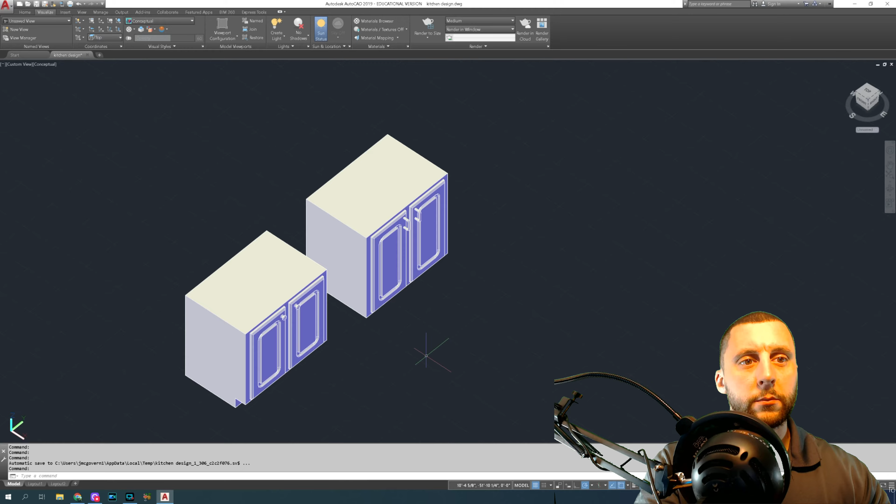Alright, ladies and gentlemen, welcome to part 4 of kitchen design. What we're looking at here is I wanted to cut out the hole or the area where the sink is going to go, and that's going to be this cabinet right here. Probably put a nice little window in front of that, and then I don't know, we'll go from there.

Okay, so going back out to our cabinets that we already have made, what I want to do is take a line and put one on this edge. We call these dummy lines, and we're going to put one on the back edge.

Now switching back to 2D wireframe, we now have two lines that we can offset across the top. So technically I actually want to put one down the middle both ways. Maybe that should have been my lines. Yeah, you know what, let's do that instead. Let's get rid of these two, and we're gonna make this into a sink.

Okay, so offset the sink. This is something that I usually go to HomeDepot.com and just find a sink that I like and see what the dimensions are, but in this situation I kind of have an idea of what size I want to go. This is a 36-inch cabinet, so if I left 4 inches around the entire outside, that's going to get me down to about 28 by, let's see, by 16.

Okay, so if it's 28 by 16, do half of those numbers. Half of 28 is 14, and half of, what did I say, 16 is 8.

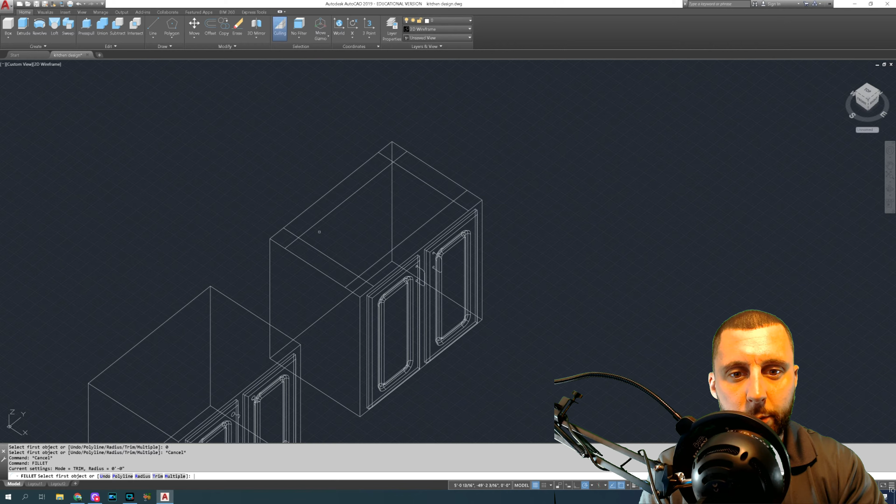Alright, now we don't need the middle lines anymore, and we're going to do a fillet radius 0. Actually, let's skip a step here. Fillet radius, let's do 2 inches.

So this is going to be a pretty big sink, but I also want to split it into two. So here's what I'm going to do. I'm going to leave 2 inches down the middle, which means you're going to offset one left and one right. Get rid of the middle line.

Trim between here and here. By the way, if you're ever having trouble trimming, you can do an old school trim where basically you type trim without hitting the extra enter, then click the two lines that are your boundaries and hit enter, and then click between the part that you don't want.

Okay, the other thing you can check is, I think it's called... oh, I'm already forgetting. Well, I'll get back to that if I can remember it. It's something Project 2 or something like that. Sometimes that setting is off. So anyways, we'll trim that, and then we'll do 4 more fillets at radius 2.

Alright, so now what we need to do is join these lines. If I go to the top, this is going to be a lot easier. Select both together, type join. They're going to stay separate. It's going to say 16 to 2 polylines, which is fine because we want 1, we want 2.

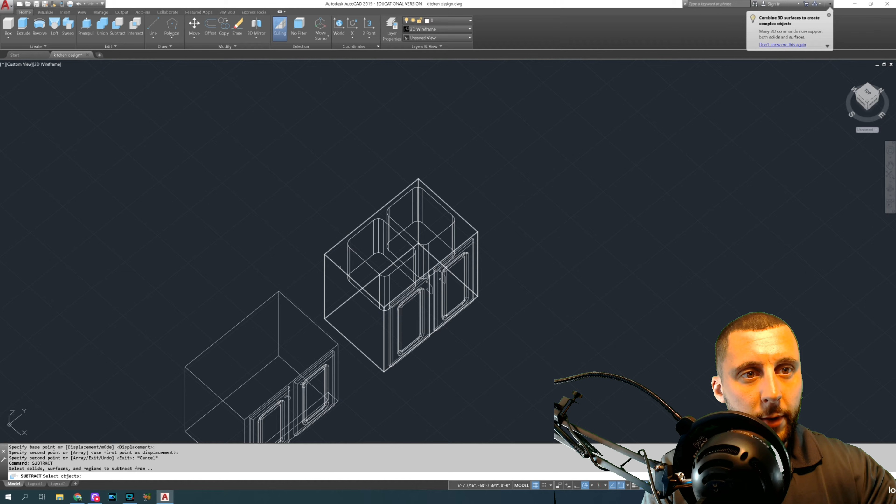That goes down into. I'm going to take these two, make copies of them, pick a base point, and then click it right down on the same base point. And then what I'm going to do is subtract from the main shape, enter, 1, 2, single clicks, enter. So now if I did take these doubles away, don't get confused here, you still have these doubles.

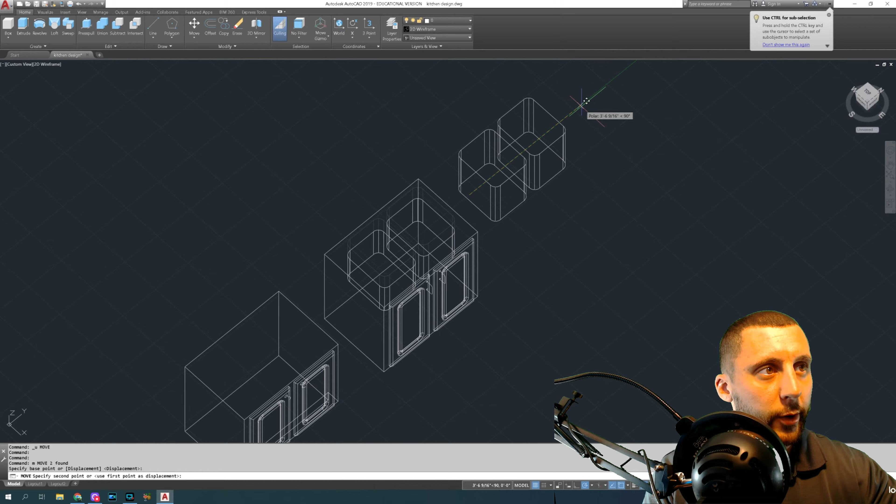If I take those away, you'll see that we cut the hole out for where the kitchen sink's going to go. Okay, so I actually am going to move these out for a second because I got one more thing I want to do. I'm going to move these out at a predetermined distance, like let's say 4 feet, and then I can move them back 4 feet when I'm done.

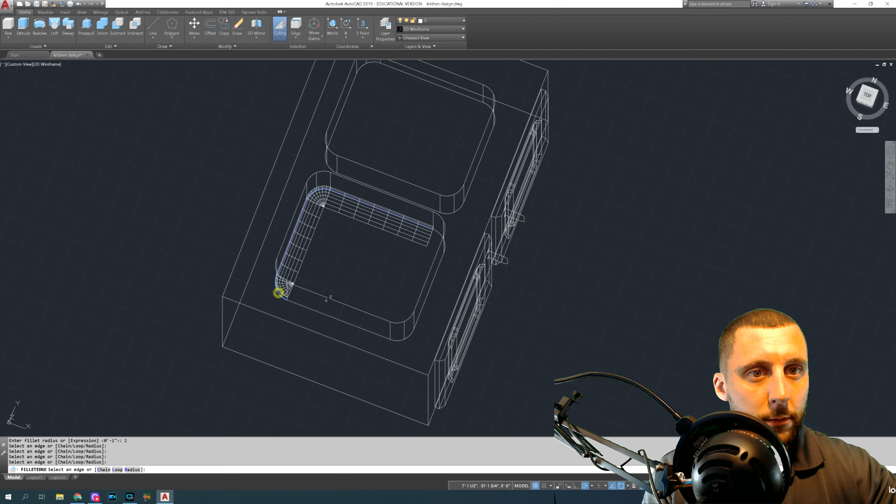I'm also going to go back to the top view, and I'm looking at a little bit of an orbit here because I want to do a fillet edge radius 2, and I want to go around the outside shape.

That way you get that curved bottom of your sink look, which we probably won't see in the render anyways, but if we do render it from higher up, it would be nice to see. Usually when I render something, I don't just render it from one view, I do a couple different views, so we might catch it in one of them.

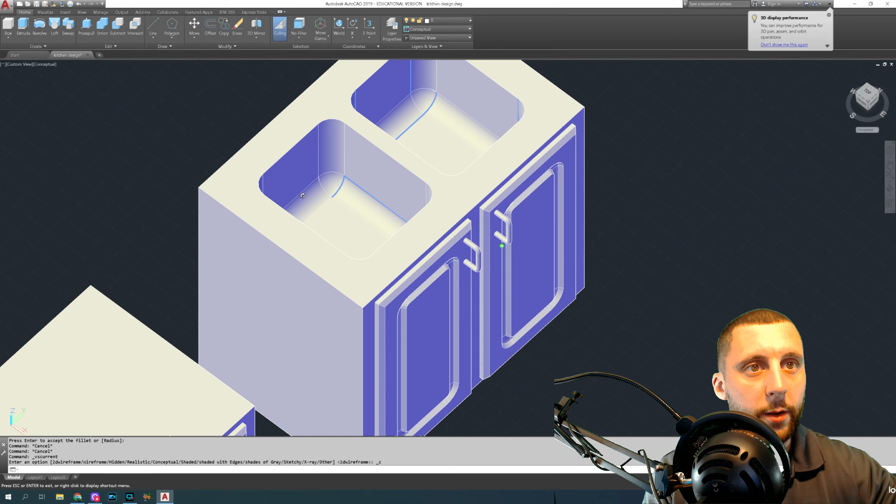Enter twice. Okay, so let's go to conceptual and see what that looks like. You get that nice bottom cabinet look, or bottom sink look. Alright, back to 2D wireframe.

Okay, so these are going to move back in. They're going to go 4 feet. Now they're back where they need to go. Back to the top view.

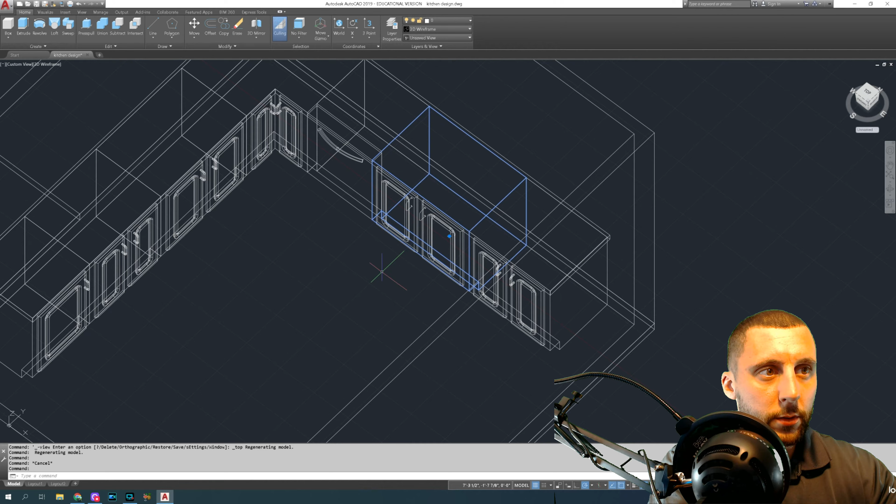Notice that this is the one that I'm replacing, so I'm going to take that box out. Let's see if we can grab it. Nope, that's the countertop. That.

Get rid of that. If I go to conceptual again, you'll see that there's nothing there. Well, if I took the countertop out, you'd see that there's nothing there, which we may need to move the countertop, so let's do that real quick.

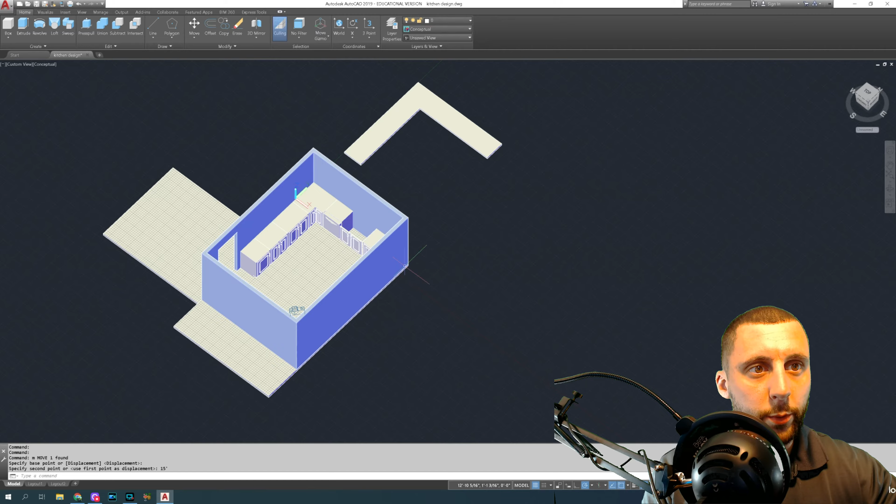Let's move that around 15 feet on the green line. Okay, 15 feet. We'll move it back 15 in a second.

We need to rotate this, so go to the top. Maybe we'll just make a copy of it. And where did that one go? Oh, there it is.

Okay, rotate. Alright, now back to 2D wireframe.

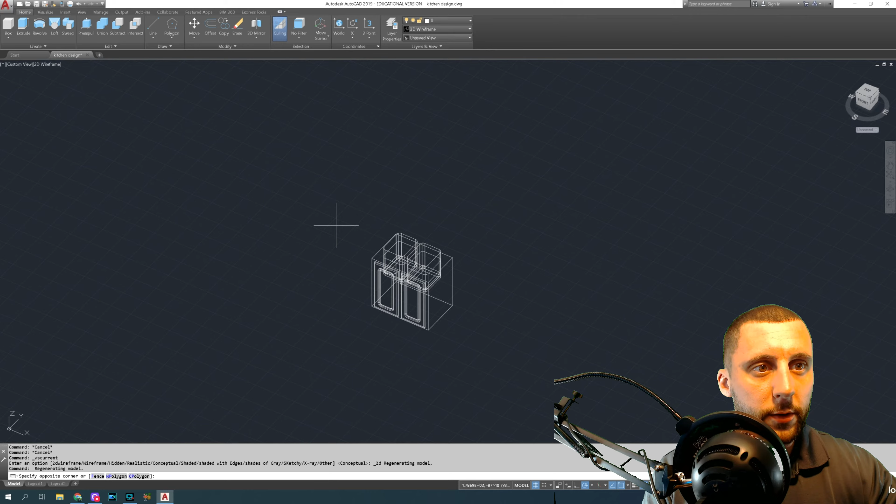I'm going to grab this whole thing and move it from this back right corner. And now this is where it gets confusing, but you can see that corner right there is where we want to go. And also, I got to get rid of these doors on here because my doors are still there.

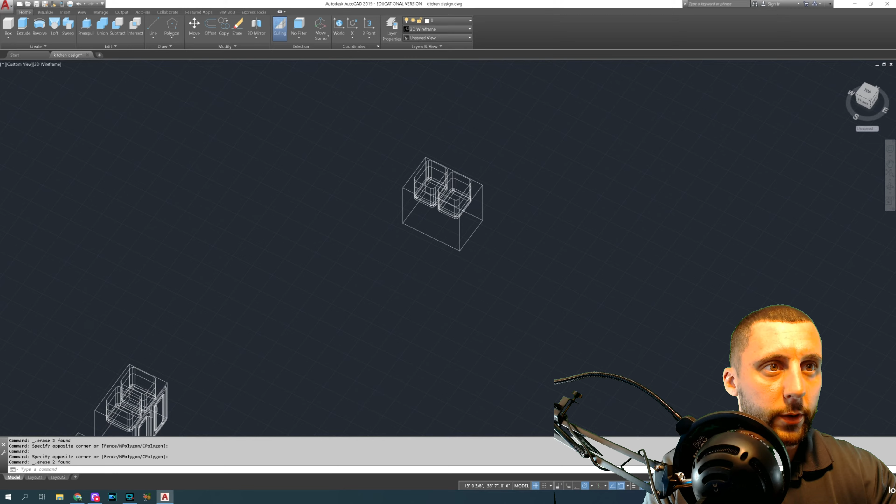So before I move it, let's get rid of 2 doors. Let's get rid of 2 knobs. We left our doors there. That's why we're doing that.

Alright, move back right corner. And we want right there.

Okay, now I'm going to move the countertop back in. We went 15 feet, stay on the green line. 15 feet, it's back where it was.

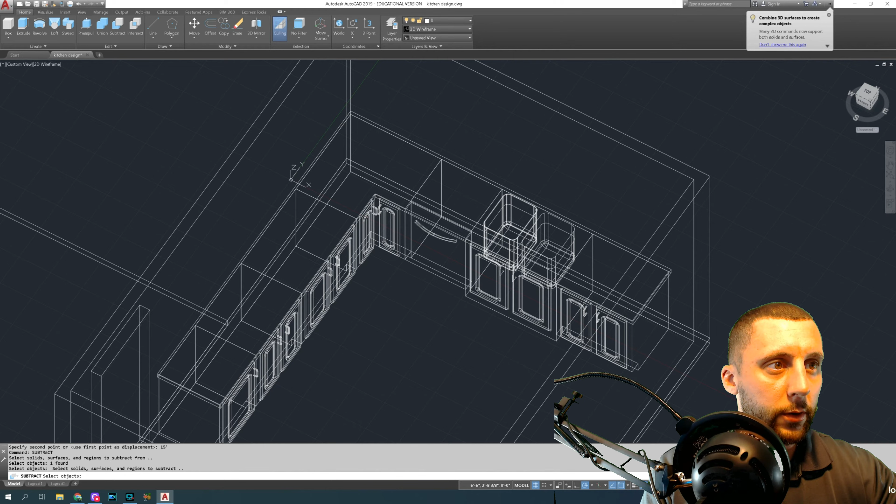You're going to do a subtract of the countertop, enter, and the 2 lines or 2 boxes that we made, enter. So let's see what that looks like. See how it's cut out for where the sink's going to go.

Okay, let's make some kind of faucet. So we're going to go back to our copy, or I guess our original. We can get rid of these 2. I'm going to create a faucet right here.

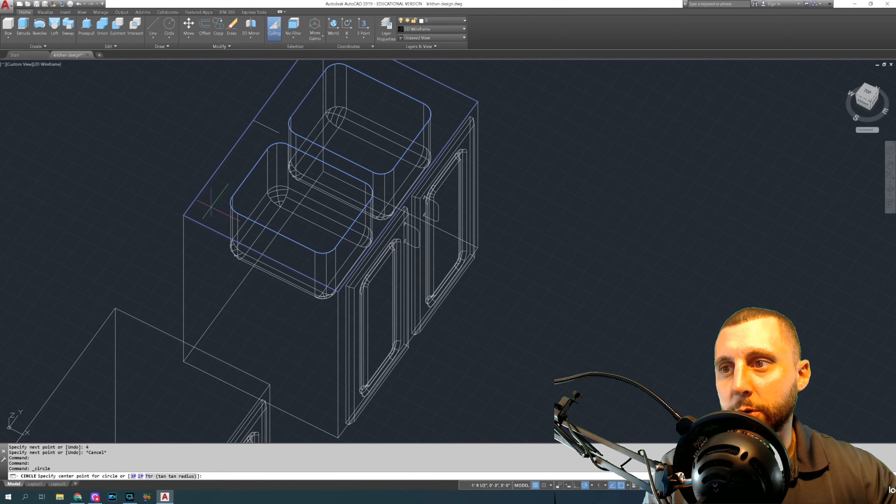Okay, so if I go from the midpoint, I'm going to go about 4 inches. That's just going to give me a point that I can draw a circle here. And make sure we're still recording. We are. Draw a circle here.

That's probably, I'm trying to think about what kind of faucet I want to do here. It's probably just going to be something simple, maybe a 2-inch diameter, so a 1-inch radius.

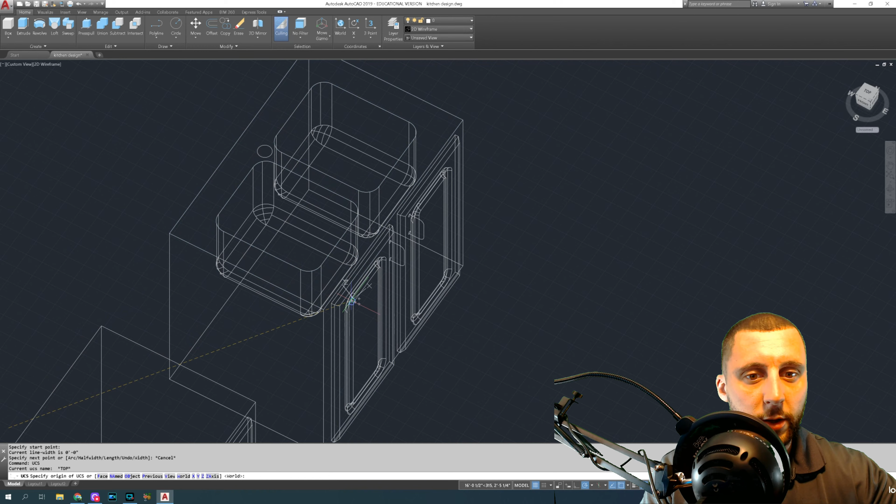Okay, and then what we have to do is we're going to have to draw, I think I want to do this with a polyline. We're going to go up. Let's see, I'm not getting a green line going up. So just make sure that UCS, yeah, UCS is on world, so that should be fine.

Let's go to our front view. Let's orbit a little bit. You know what? Sorry, go to the right view. Okay, we're over here. Orbit.

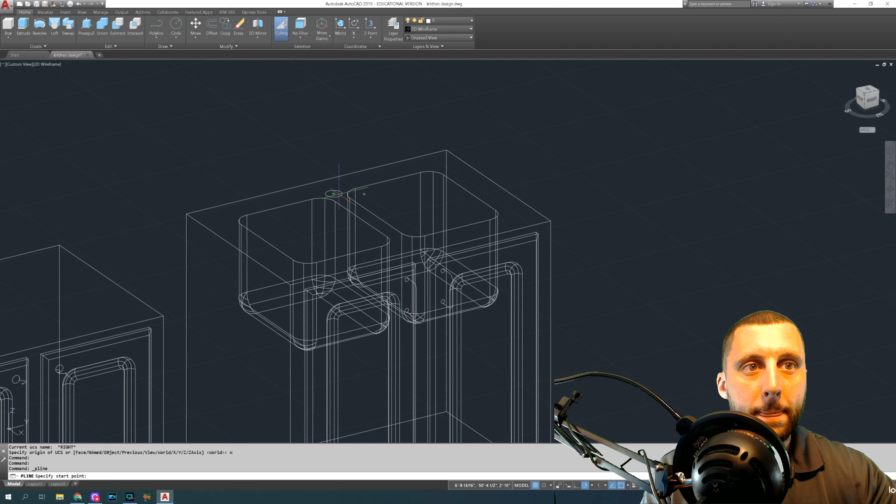Let's see if this allows us to draw up now. Center of the circle. Yeah, see, we can't get that line going up. So that's odd. UCS world.

Maybe it's the polyline, let's try a line. There we go. We're going to have to join it anyways because we're going to need a polyline.

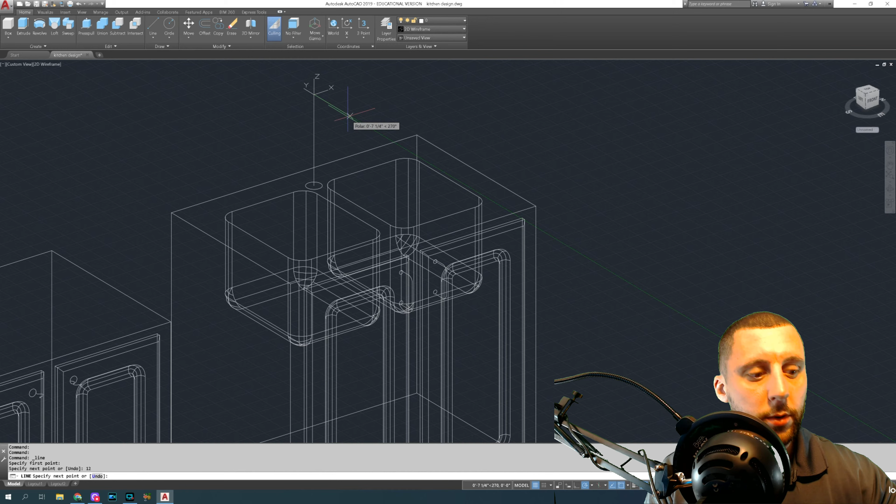But let's go up about 12 inches, and then let's come forward about... this is going to be one of those ones that swivels from one sink to the other. Obviously, it's not going to swivel. Let's come out about... I don't know, let's say 8 inches.

And then we're going to go to the front view and orbit down a little bit.

By the way, this orbit that I constantly do, I'm holding shift, and then I'm holding down the scroller on the mouse, and then I'm moving my mouse around. It's not the same thing as going to this orbit tool, because when I'm in this orbit tool here, I'm stuck in that tool and I have to hit escape.

Whereas if I'm in fillet radius, let's make this like a radius 2, I guess, if I hit this, I'm going to get stuck in the orbit tool and it's going to boot me out of the other tool. But if I go into, and I just do my orbit the way I just said before, it doesn't boot you out of that tool.

Alright, so we got that. Alright, now we're going to need a line going down. We'll go down about an inch.

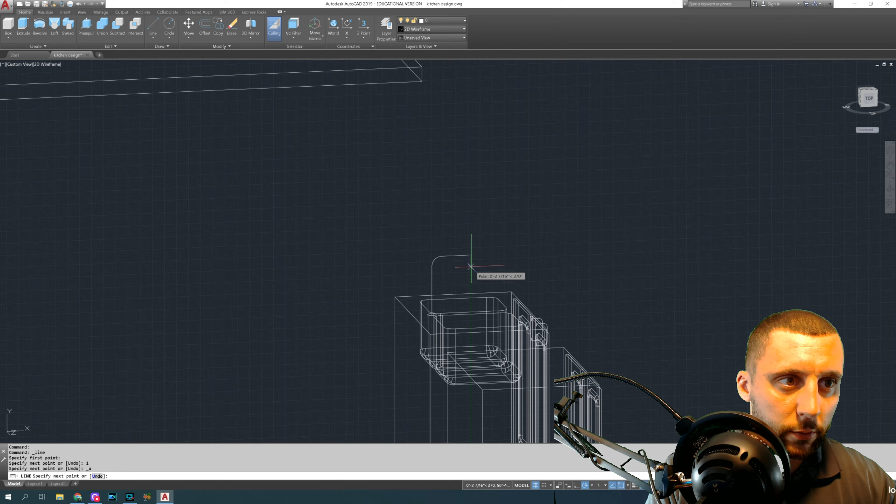Actually, we got to go down about 3 inches, let's go 2.5, because when I try to do this fillet, I need to be at least 2 or more. So we get something like that.

Okay, now take these lines, join them together, and then we're going to do a sweep. See how it went to a spline? That's okay, it should still work.

Sweep, what do you want to sweep would be the circle. Enter, and then what do you want to sweep it along? Let me get something like that. Let's orbit back and see what that looks like.

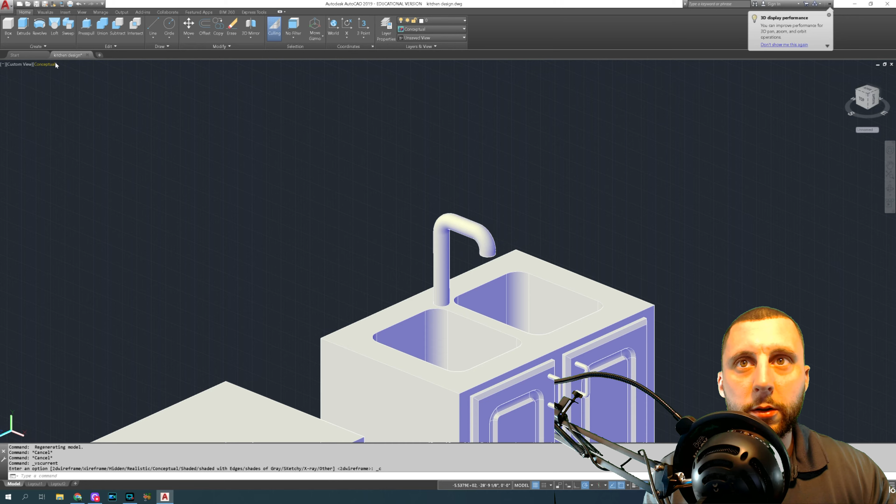Okay, that's a little on the thick side, so I'm going to back that down. Let's undo. Whoops, not that far. Let's stay... yeah, I'm sorry, it is going to be that far.

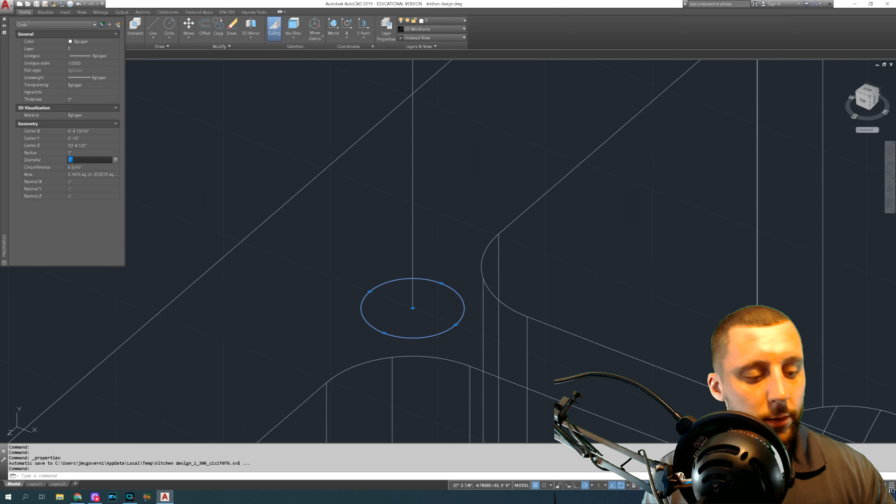We need to change this circle size. Here's another way to do it: click the circle, right click, go to properties, and you can change the diameter, let's say 1.25. Now it'll just do it from the center and size it down.

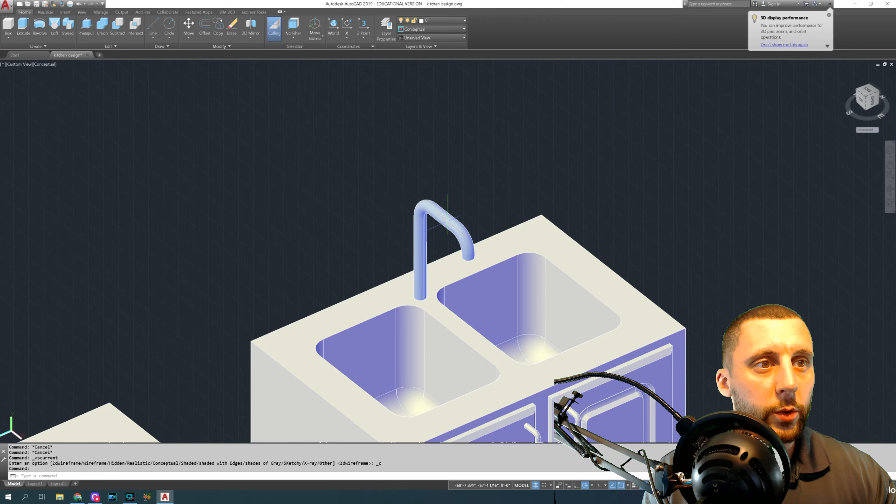So: sweep, circle, enter, spline, or whatever we have, polyline spline. So we get this shape. Let's go to conceptual view. That looks a little bit better.

Now what I'm going to do with this is take that shape again, go to the top, back to 2D wireframe, take this, and make another copy. I just don't want to disrupt the one that I already have. I should have made a copy before I cut that sink out, but that's okay, it doesn't really matter. I need to rotate this.

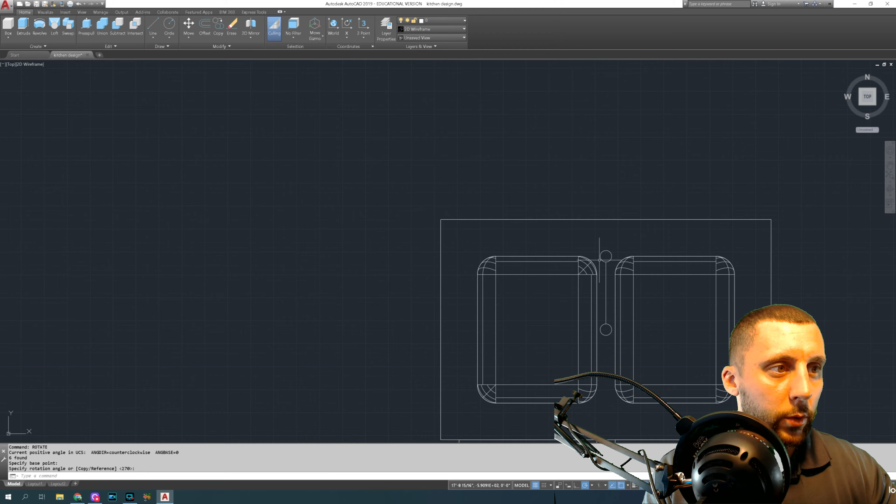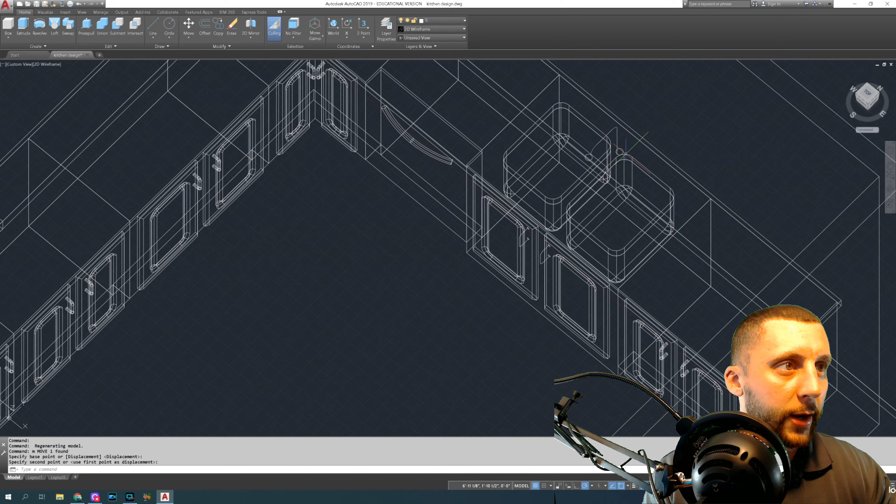Rotate, we're going to make it look like that. We're going to take this and move it from that same bottom right corner, although we're not going to be able to see that corner. Let's go into one of these handles, the right handle, the center of the circle - a nice base point that gets it in the same place that we want anyway. Let's see what that looks like on conceptual, and that's pretty nice.

Okay, it's just simple, you know, it's the Hollywood effect. Alright, let's cut out a window above that and then we'll call it a day on this part 4 video.

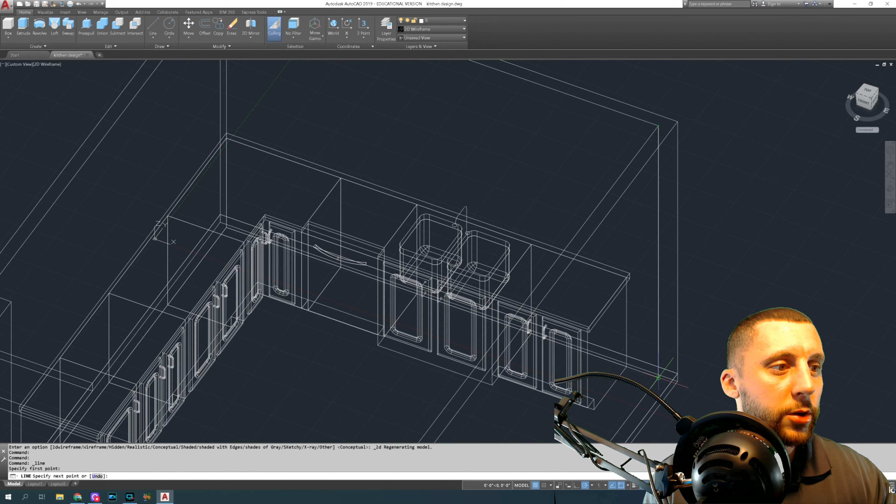So, 2D wireframe. What I'm going to do is draw a line on this inside edge, and draw a line on the top edge, and go to the front view and then orbit a little bit.

By the way, if you want to see what this looks like: view, double click on camera 1. You got to drop this down if you see the plus. Double click camera 1, hit apply, hit OK. So I don't have any materials on there yet, but you can see that the sink is cut out and it looks pretty nice.

Alright, so we're in the right view. This is going to come down. Okay, so I don't remember how far we made this - 7 feet probably, or maybe 6'8".

So let's go to the front real quick. Oh, I made the walls 8 feet. So if we want to go 7 feet, we're going to come down a foot. If we want to go 6'8", we're going to come down 1'4". 6'8" is really your standard height of windows and doors, so hopefully I did 6'8" when I did that door, but it really doesn't matter - sometimes doors have a higher head height than windows.

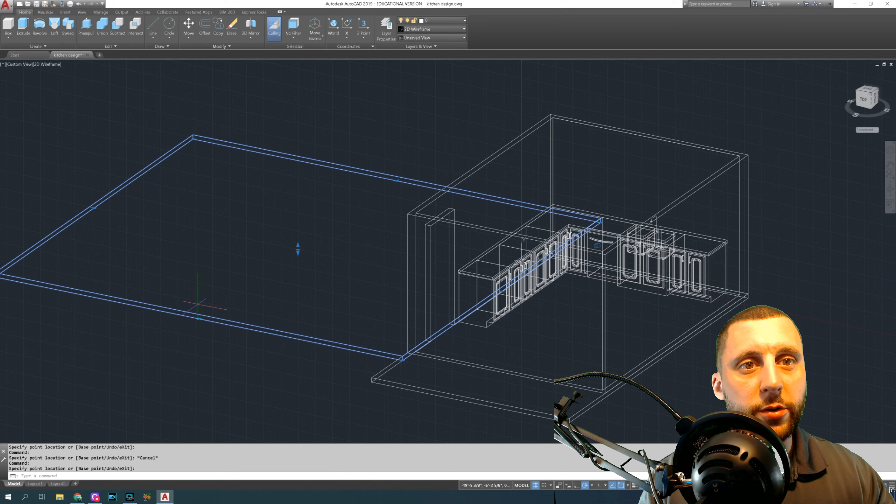By the way, this piece back here needs to be stretched more, because I was looking at the render and I can see a black space. With that black space, you either got to put a wall up there or put in this infinite floor. I'll show you what that looks like one more time.

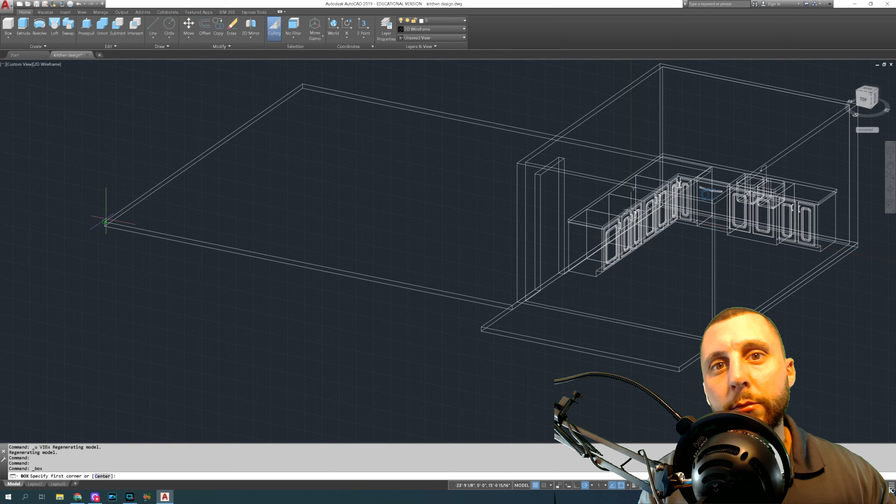View, double click, apply - see, we're seeing that black back there. So keep stretching that back if you want to keep seeing floor, or put a wall back there - that's totally up to you. Okay, that looks like a pretty big room there. So let's go back, maybe we'll just put a quick wall.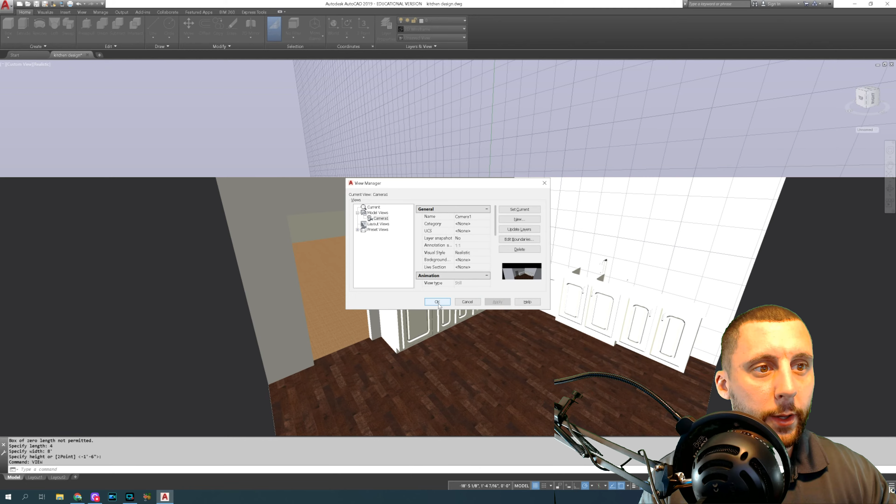Okay, we're going to click that corner, hit length, go back here, go this way on the green line 4, then go up 8 feet, and then go that way until we get to there. Let's do view again, double click camera, hit apply, hit OK - now we see a wall back there that we'll fill in with some kind of color.

Okay, alright, so going back, where were we? We want to come down with this line. So we're going to do an offset of 1'4" - that's going to be the top of our window.

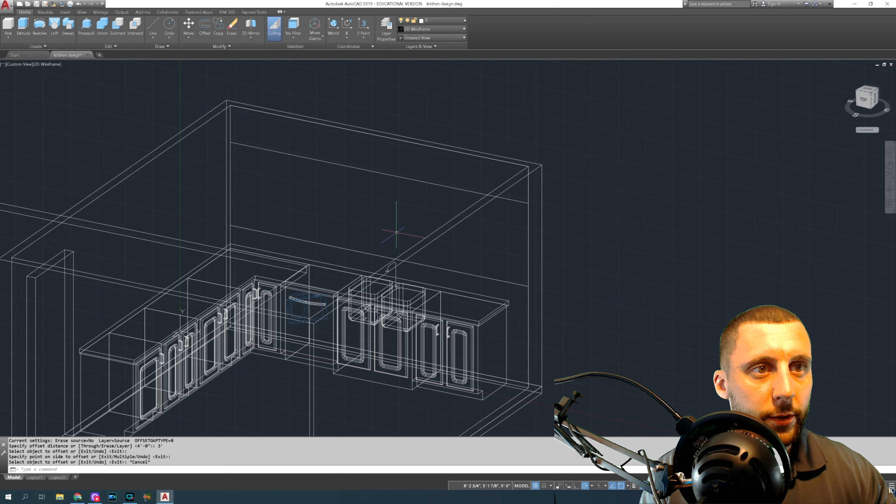If this is a, let's think, 3-foot cabinet, it's going to be a 2-foot wide window. So maybe the window itself is 4 feet tall. Let's come down 4 feet and see where that ends up. That's a little low - let's try 3 foot. That's pretty good, so that's a 3-foot tall window.

Okay, then we're going to come over - we want to get in the center of that cabinet there. I actually don't know how far it is from there to there. We could dimension it, well, let's do this instead. I don't think I put that in the middle of the room. Let's go like this and go back to the front and see how close we are.

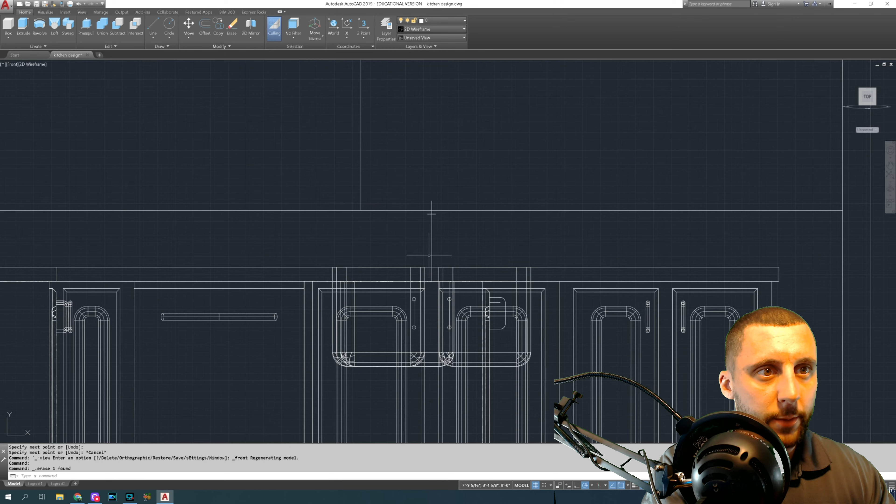Pay no attention to this one. This is on the other shape that's in front of this object. You'll see as I orbit down, that's way in front. That's not exactly centered, so I'm just going to look and see if I could get this.

Let's just go about 10. All right, that's pretty close to the center. It really doesn't matter. You're not going to be able to see how centered the window is, but we could have dimensioned it. I just don't feel like doing it.

All right, so now we're gonna make this a 2-foot window. We're gonna go 12 left, 12 right. Get rid of the middle line. Fillet radius 0, from there to there, all the way around. Now there will be no cabinets above the window, but we will have some top cabinets later that end at the window and then start and go over here. But we'll cross that bridge when we get there.

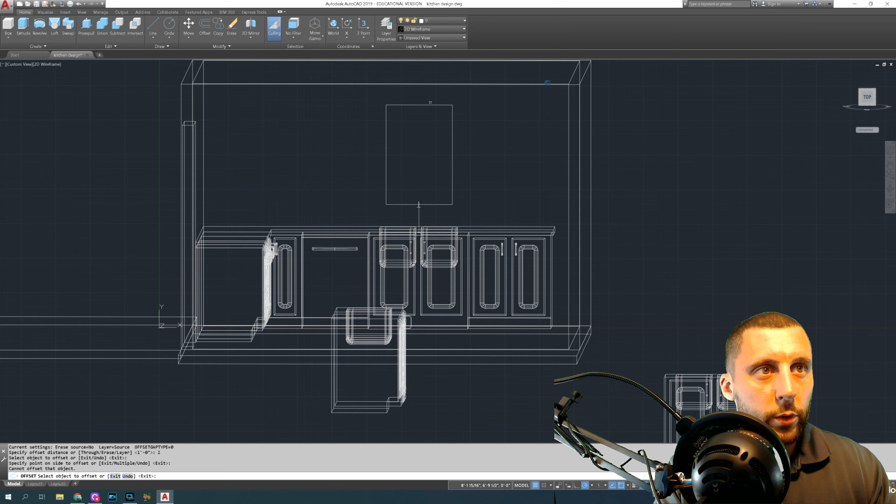Take these, join these together, offset by 2 inches, and bring that in. Whoops, why are we not offsetting? Let's reset our view, go back to front. Okay, get away camera. Offset 2.

Can we go 2 out? That's odd. Alright, let's copy this window out. You know what? Let's explode this, pull it back apart, offset 2. This is the long way of doing it, but for whatever reason, it's not working.

You probably won't have that problem. I don't know why I'm having some problems here, but if you do, then just explode it and do a radius of 0 for your fillet, and just go around and do this.

And now we got to select. You can actually select all these in one shot again, just like we did earlier. So we've got 8 lines. Join, it should go to 2 polylines or 2 3D polylines.

That's fine. This one is going to get extruded through the wall, -4, and you're going to subtract from the wall, enter, the window, enter. Okay, so now we have a hole there. So if I go to conceptual, you'll see that there's a hole. Okay.

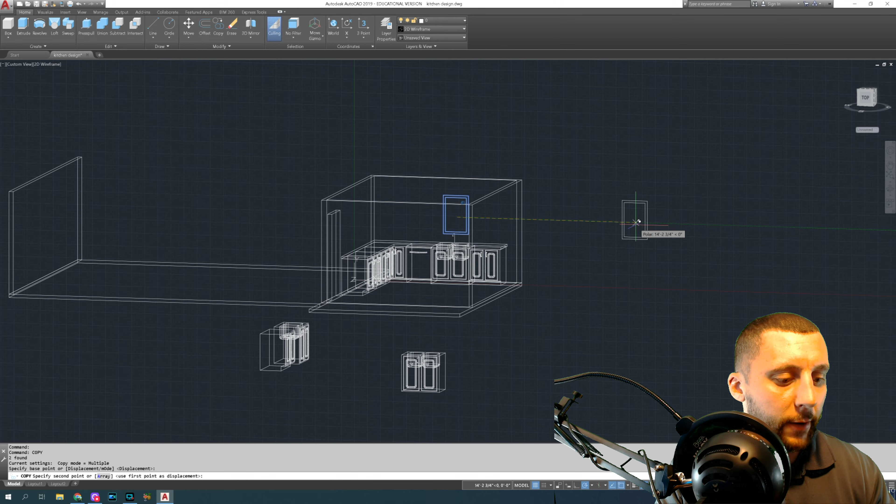You know what? Before you do that extrude, let's back up. We need a copy of this one. Let's copy this out. Copy, let's go out this way about 15 feet, and I'll explain why in a second.

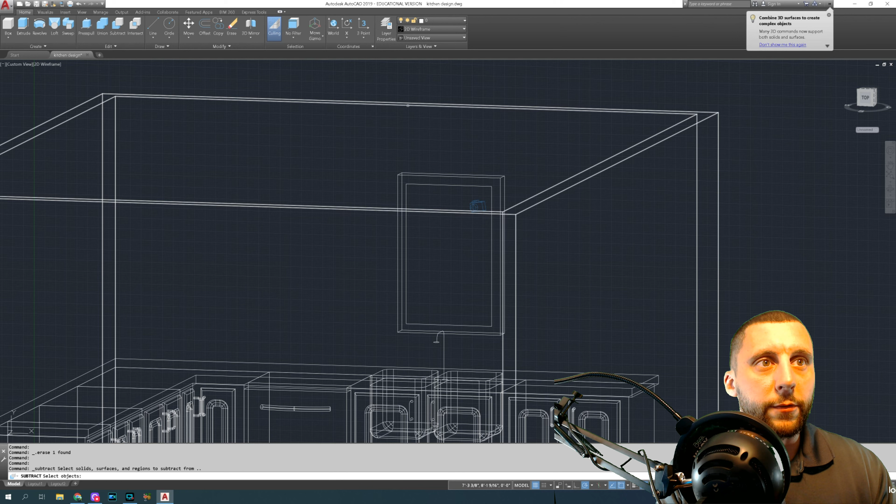Now you can extrude. Whoa, that was bad typing. Extrude -4, subtract from the wall. Oh, that's my dummy line, get rid of that line. Where's that other line at? I think we're good. Subtract from the wall, enter, the window, enter. So there's a hole there now.

Now go out here, let's go to the front, flat view. What I want to do is I want to extrude both of these -2, which is going to look like that. And I want to, before I go any further, draw a line across the midpoint.

I want to do an offset 1 down, 1 up. Get rid of the middle line. I want to connect here and there. 1, 2, 3, 4. Join.

I'm going to take that and extrude it back, -2. I'm going to union. I'll show you what this is going to look like in a second. Whoops, oh, let's do our subtract next. Subtract from the big window, enter, small box, enter. So you'll see that we get something like that.

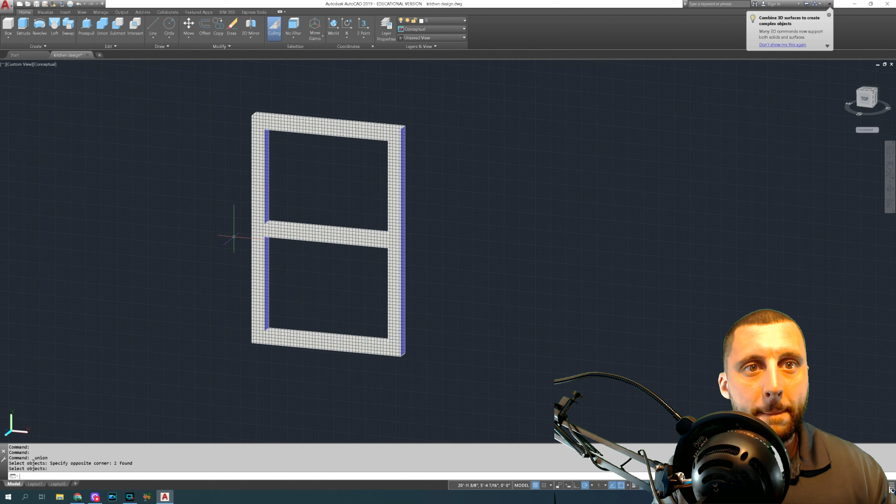But I want to union these together. Something like that. Now go back to 2D wireframe.

Okay, the last thing I'm going to do is put a box at the back of this that comes forward 1 inch. That's going to be filled in with some kind of glass. Usually I do a tinted glass, so otherwise you would see through it and just see into like black space out there.

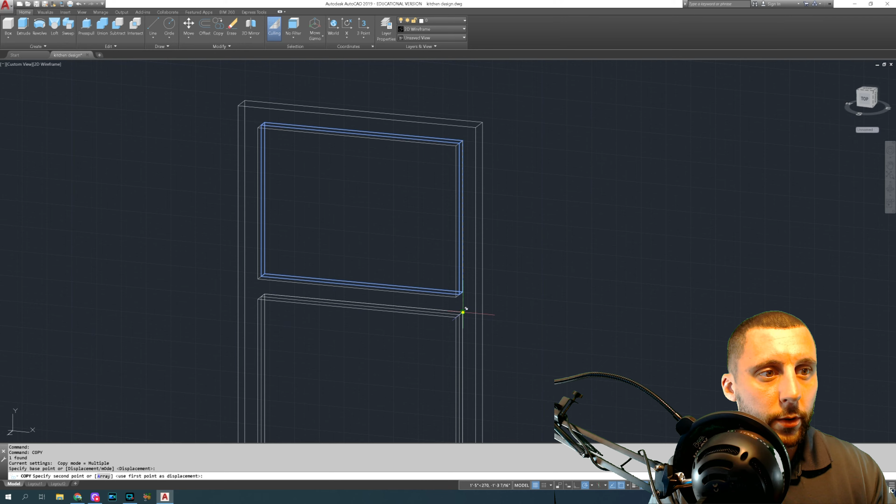But that'll go tinted. So we'll take that one and we'll copy it from the very back corner to the very back corner of this one. So this window's done. Okay, take this window.

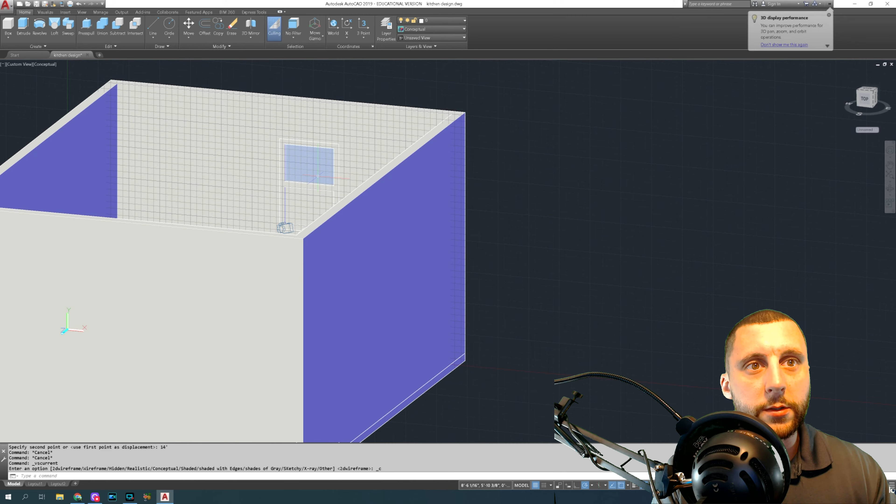We can actually get rid of this one over here. Take this window, move that over by 15 feet. Oh, it wasn't 15, maybe it was 14. 14 feet, there it is. And then go to conceptual and see what that looks like.

And you can't see through it because of these, but later on they will be filled the correct way. Okay, and let's see, are we recessed right now? We actually should take these, it's a 4-inch wall, so we're gonna go back 2. I like it like that.

Okay, and that's pretty much it. If you want to start putting materials and stuff on there, feel free to go for that. We're already at 20 minutes, and I like to do materials all in one shot, but that's pretty much it.